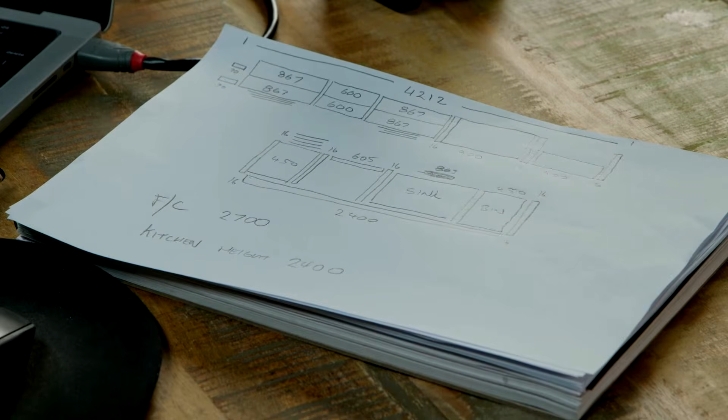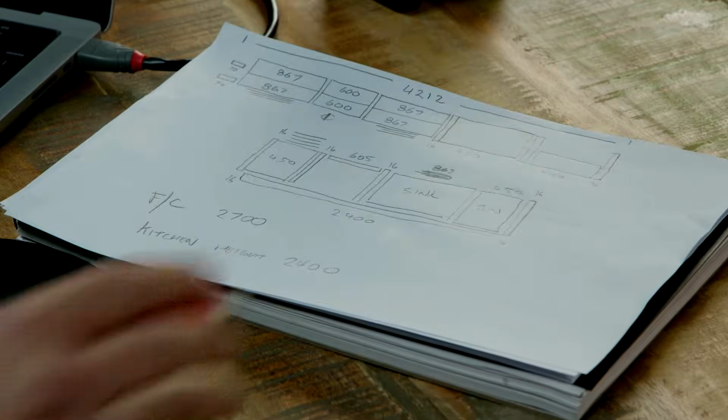So let's jump into the portal. I'm going to assume you've already set things up, but let's go through the room settings anyway, just to show you how fast it is to do.

So, change room settings here. We're going to go kitchen, laminate kitchen for this one. We want flat pack, supply hardware, and we're going to use adjustable legs. We're going to go across the top. Hardware selection, Blum soft close. Got to be the way.

Blum and Tandem, we wouldn't be using Metabox. Remember, they've got the gallery rail. If you wanted a closed side, you could go the Legrabox Silk, but for this one, let's go the Blum Tandem.

Select your default cabinet. We're going to do a solid top. At least that way, if you've got a solid top, you can always pick stone. Awesome stuff. Go across the top again.

Exterior color, all I did was browse colors. We're going to go melamine, flat panel, and choose a Polytec color. There we go. I've already picked Angora Oak, but just so you guys can see it, let's try Antico Oak. There we go, and you'll see it put the edging in as well. Apply, we're good there.

Carcass color selection, we'll keep it white carcass. Product size defaults, now this is the most important thing.

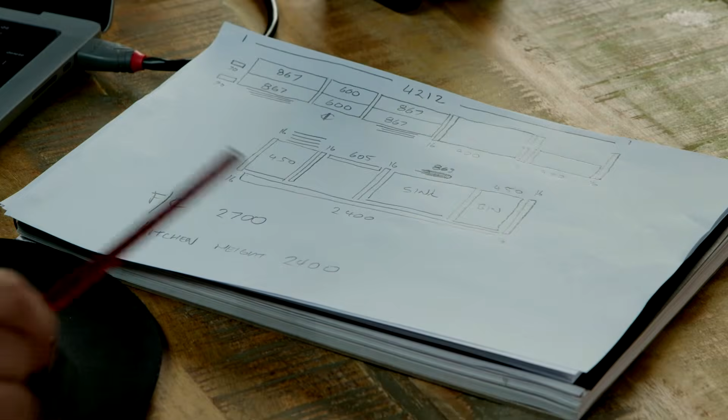As we can see here, floor to ceiling is 2700. My kitchen height, I want it 2400. What does that leave us? 300 mil. Let's assume we've got a 90 mil cornice, so we'll do like 170 mil bulkheads. There's no point going 300 mil, you might need to buzz it down. We can keep it 30 mil down, since we're using a 90 mil cornice anyway, so we'll get back to that.

So, I want a 2400 kitchen, kicker height 140, 2400 overall. We're going to make this 2260 plus 140 is 2400, leaving about 650 under here. For our overheads, we can do about 800 high overheads, as you can see, 650 for regulation, for your hot plate to the underside of the range hood. And that's it, update room.

And we are good to go. As you can see here, most important part, 4212. Now remember, you have your Zoom consultations, free Zoom consultations, so I really recommend you use them if you need a hand, but otherwise just make sure you have your overall measurement.

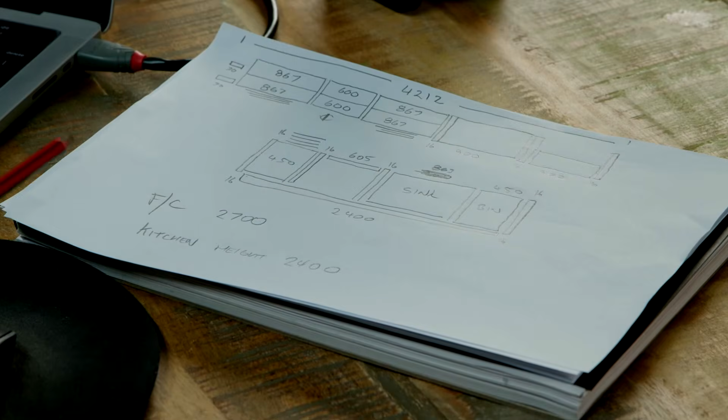So we've got our 30 mil infill going up against the wall, 867 pot drawers, 600 hot plate and underbench oven, 867 pot drawers. We've got a 16 mil panel, 900 pantry, 16 mil panel, 900 fridge overhead, and another 16 mil panel. So we're going to start bringing that in right now.

As you can see, go straight to add product. Let's close the cart there so we can see. We're going to go to base cabinets, applied panels. First thing we're going to do is go straight to base filler. There we go, perfect. So as you can see, it says 80 mil.

Now it's already set to our defaults, 740. Why do we not want this at 880? Because we want to run the kicker all the way through into the wall, so we're going to stop it above the kicker height. So 80 mil there, we want a 30 mil filler. The reason we have it at 80 is if we cut it any smaller, it'll move on the CNC, so we'll trim that down for you guys.

Variation request, please: if I can spell, please cut to 30 mil, and that's it. Save. And first one in, that's it.

What are we going to do next? We have an 867 pot drawer. So again, simple, add product, we're going to go to base, base drawer cabinets, we're going to go to a 3 drawer. Defaults are already set, so you don't need to adjust that, but we now adjust the width - this is where the customization comes in. Forget 600, we want 867. So 867, 560, we are all good. If we ran across to drawers, it'll even show the drawers we had put in there, the Blum Tandem 30 kilos. So all good, go back to specs, bring that in, save product.

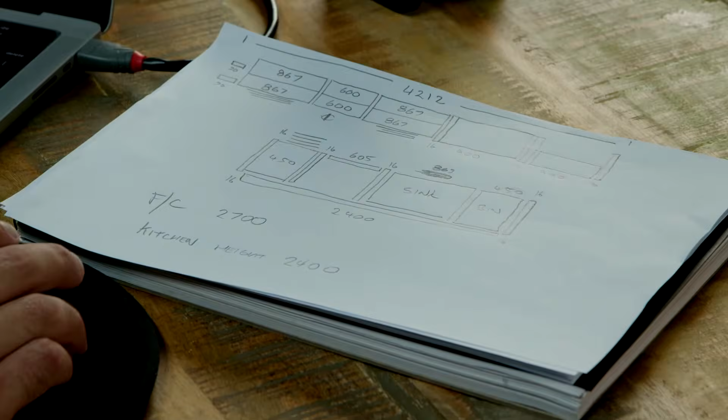Underbench oven. Now, we need another set of drawers. So either you can bring it in again, or you can go 2. Simple as that. There we go. 867. So now what do we want? We have our filler piece, we have our 2 sets of pot drawers, and we have an underbench oven.

Let's check our 3D room planner. Now here's something already done for us, right? Look at that. So we're gonna move that around. As you can see, we've got our double drawer. We're gonna put that over there. Let's get our, done. Yep, we understand. All good. Get our underbench oven, bring that across.

Nice. Grab that up against there, and we are all good. That gets a bit closer. Very nice. All right, great. Open up the hamburger there so you can see what you're doing.

Exit 3D room planner. And now what we're going to do is we're going to get our panel for our pantry, and it will also be set to defaults. So we'll go to add product, close the cart. We're going to go to tall.

Applied panels and fillers. Tall applied panel. And as you can see, it's already set to 610 to allow for your bench top, the extra 20 mil that hangs over. 2260. Now, do we need this to run to the floor? No, we don't. Reason being, we have panel, we have pantry.

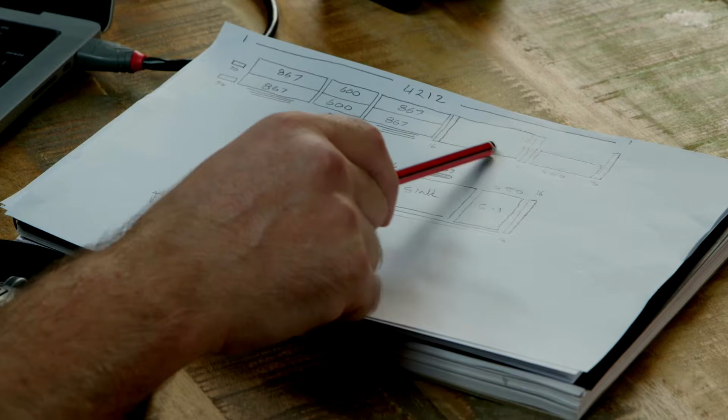That panel will run to the floor because we've got the fridge in there. So we want the kicker to run all the way through here into the fridge end panel or the right-hand pantry panel. So we are all good with that one there. Save product.

Fantastic. We bring in the pantry now, add product, tall. We can just go to tall cabinets, tall 2 doors, simple as that, as wide as possible. We don't want to go, 900 is a really good size for a pantry and things like that. Start getting a little bit bigger. You know, you don't want your shelves to bow. And 900 works well, especially because of the 450 doors. So that's it. That one can come straight in.

Nice. Let's go back to our 3D room planner and just double check that. There we go. It's all looking pretty good. We'll turn that around. Yep, panels in there as well. All right, guys, so we've just brought the pantry in. So let's go for the other full panel now on the right-hand side of that.

Add product. Same thing. We're going to go to tall, applied panels and fillers, tall applied panel. Simple as, does it extend to floor? Yes, it does. Adds the 140 kicker on, 2400 overall, and we are laughing. So save product. Very good. Close the cart.

Let's go to our 3D room planner, see how that's looking. Okay, where's that extra panel? Is it snuck in here somewhere? Yes, it is. There you go. So we're going to put that panel there. And as you can see, it runs to the floor.

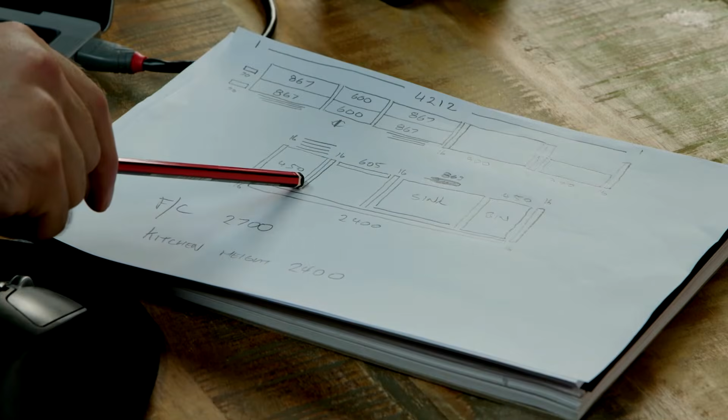Now this is where it's a little bit trickier. That dishwasher space there, it's purely just a space. That's a full end panel, 880 by 580. That's just a 605 rail, purely because your dishwashers usually finish at about 850 high, and you want your kitchen to finish at about 900. So what you do is allow a little piece with L brackets there just to be able to close that gap between the bench top and the dishwasher.

So for that one there, we've got our 450 drawers. We're going to go to add product, we're going to go to base, we're going to go to applied panels, base applied panel, close that there, extend to floor - yes it does. And we can go two of these, and we're going to go save product.

Simple as that. Now we're going to go into the 3D room planner again. Let's check this out, let's move this over here. Let's grab this here, bring that over. We also want to turn it around, so we're going to move that. There we go, we're going to get this panel here, as we just got.

I'm going to move that out the way, grab our end panel, put that there. I'm going to grab this end panel and put this here. Now again, you could work that out - see how you got the measurements there? Let's zoom in on that. I wouldn't worry about it, reason being we're going off this, right? We're going off our design.

So what we're going to do now is exit 3D room, and we're going to go to doors and panels section. Now we'll do an entire episode, tutorial, whatever you want to call it, on doors and panels - this is where you can do a kitchen facelift. But for now, what we want to do is just go to panel, and we want to do our dishwasher rail for the top. As simple as that.

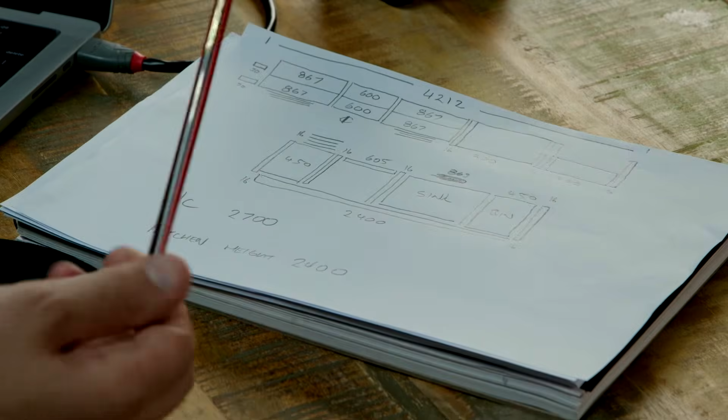Now, our two end panels, as you can see here, we always recommend, you can do what you want here, but we would always recommend putting the end panel inside those ends. You don't want to see, well personally, you don't want to see from the side a line on the end panel. So we extend that from 580, we'll make it 600. Simple as, we're just going to go to add product, base, applied panel. Let's close the cart, sorry about that guys. As you can see, 580 is the default, we're just going to change that to 600. And we're going to extend it to floor, 880, and we're going to go 2, and we're going to save product. That's it, so now we've got our end panel and our end panel.

Let's go back to our 3D room planner. Cool stuff, so it is putting it over there, but that's easy fixed. So we'll do that, let's turn that bad boy around. I'm going to put that in there just like that. Let's grab the bin now. Oh sorry, you can zoom in on this stuff as well guys. Let's get our end panel right there. As you can see from the side, see how it's sticking out? An extra 20 mil, because the back panel will sit on the inside of that. And we're going to grab this one here. There we go.

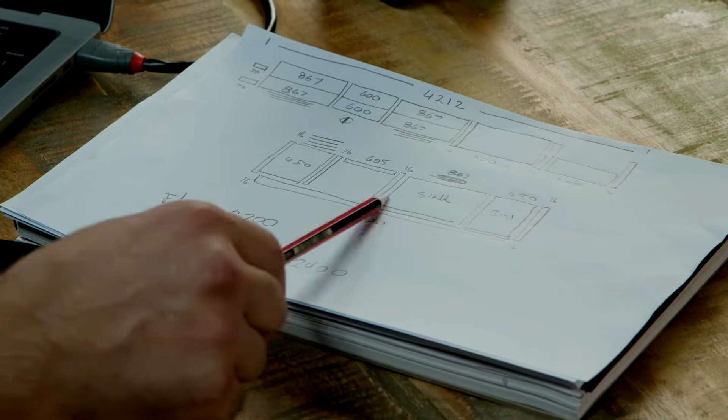There we go, and we are good to go guys. Now, we worked that out before, 2,400 sheets, especially with the laminate color board. So we adjusted this to be 2,400 in between. So now what we'll do is, let's go back to our joinery there. Let's get out of our 3D room planner and let's just grab our panel. Now, there's multiple ways you could put this in. You could put this in through the doors and panels section, but you could also simply just adjust this. So we're going to go to base, applied panel, base applied panel. This runs all the way to the floor obviously. So we want 580, we want 2,400, as you can see which will be fine. It won't flag. Oh, I wonder why that is the case.

Actually, very important. So because we've chosen a grain board obviously, they come in 2,400 by 1,200 sheets. So the grain will be the 2,400. So basically what we're going to do is, if we wanted the grain to run up and down, we'll do this in 2 parts. So we would do 2 at 1,200, which then it will unflag for you. So if something does flag in orange or red, it's trying to help you. Don't let it freak you out. Let's do it this way for now. So we'll do 2 back to back, up and down now with the grain, save.

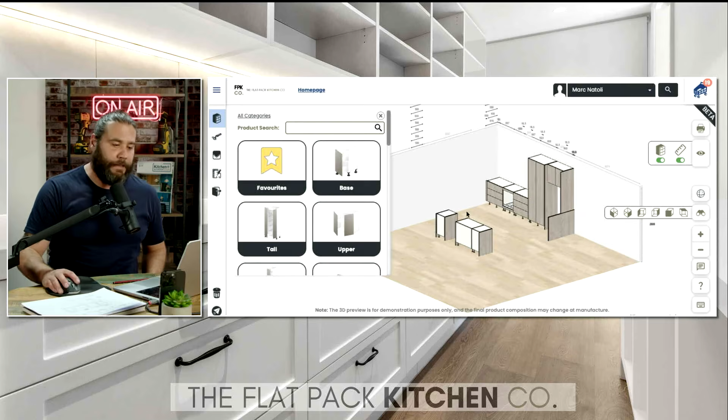3D room planner, and that's it guys. Whether you put it at the back or not, because again, I didn't really worry about making that 605 because it didn't really matter. But that's where that will go. So let's get rid of that. So you can see, grab one of the panels, move this out the way, grab that, turn it around. There we go, and as you can see it goes, that's perfect. This one. Oh, there you go, must have got it pretty close.

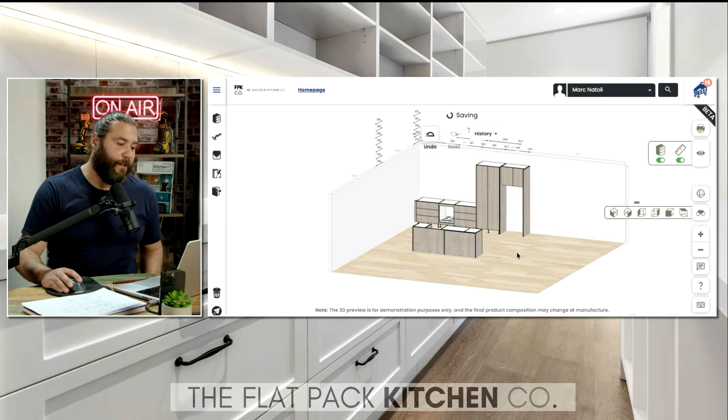That's it guys, this is why it's very important to have this, all right? This is secondary. If this is wrong, doesn't matter what you spend on it, it's going to be a waste. And then the thing is, well that's not the case, but again, if these are wrong here, you can't just be cutting down cabinets. You don't want to have to cut down drawers on site and things like that. So again, feel free to use those free Zoom consultations, that's what they're there for, especially before you order. It's always good to have another set of eyes to go over it. And that's kind of it for this one guys.

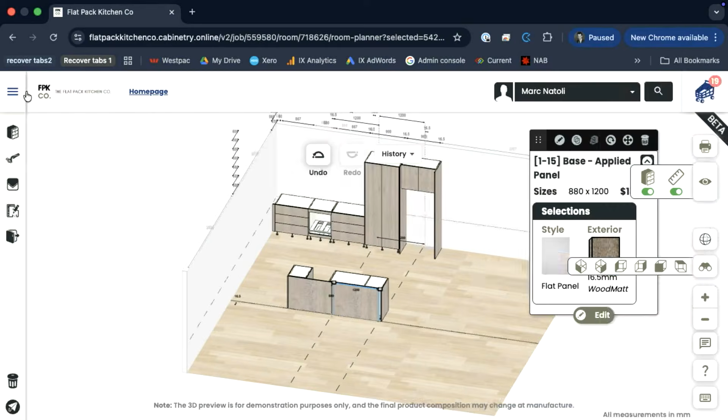So what did this kitchen come to? Let's have a quick look. Exit 3D room planner. Yeah, we're looking at 7,900 for that one there, flat packed, all ready to go with all hardware. There you go guys, hope you enjoyed that one and stay tuned for the next episode. Thank you very much.